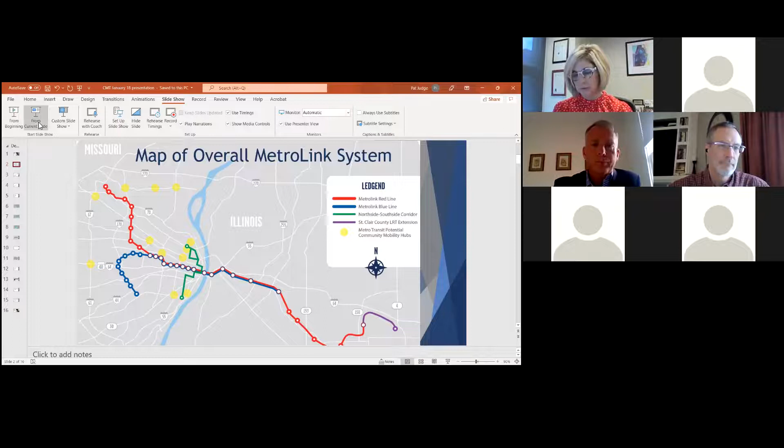So it's important to talk about the stakeholders in this particular project. The project is being funded through a $96 million Rebuild Illinois grant issued by the governor of Illinois, and it's being administered through the Illinois Department of Transportation. Obviously, St. Clair County Transit District is the lead agency on this project, and they've been great to work with so far. The elected officials of St. Clair County are a big part of this project, as well as Mid-America Airport. Of course, the county controls the airport, but Brian Johnson's been great to work with at the airport.

The other stakeholders on this project are Bi-State Development Agency, or Metro, because essentially they will take over this project. We are building this project for them to take over, own, and operate in the future. As Kim mentioned, our company, Gonzalez Companies, provides project management oversight during design, managing the design process.

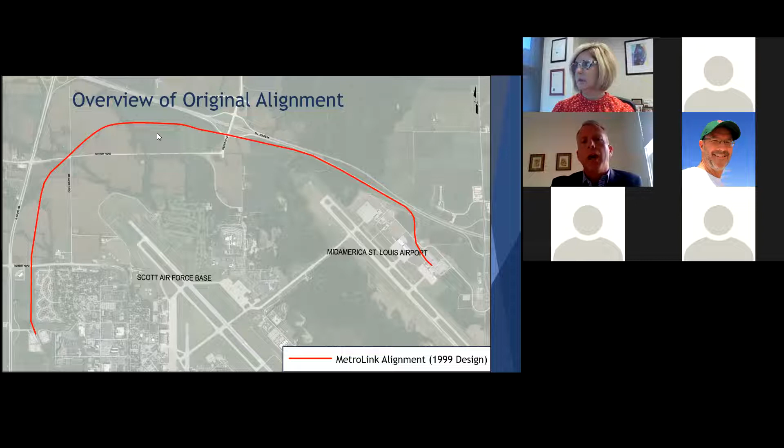First of all, there's been a tremendous amount of development in the area. And when you look at this red line alignment out here, hugging the interstate above Wherry Road, you'll notice it cuts across some prime real estate. So what you'll see on the next slide, and of course we deal with the wetlands which we'll talk about later, is the current alignment, the yellow line on the screen, and we've dropped it down below Wherry Road. The purpose of that is to free up and open up development property above the Metrolink, between the Metrolink and Interstate 64.

So we've been able to drop that alignment down, open up development opportunities for the county. We also eliminated an at-grade crossing, which is a big deal from a safety perspective. Furthermore, on the right-hand side of the screen, you'll see that we have moved the Metrolink passenger station out to the edge of the parking lot. That was at the request of the airport, because essentially by having the Metrolink right up at their front door, it really put some parameters and constraints on the airport in terms of all the development. So there will be a path between the airport front door and the Metrolink platform out there.

As I mentioned, a bike trail, if budget allows, will be included in this project. And that's the blue dashed line along the alignment here.

It's hard to see here, and I'll pop out of the screen, but the access road that I mentioned is a key part of this project. So as it stands today, if you're along Interstate 64 and you want to get to the airport over here, you have to come all the way over to Illinois Route 4, drop down and backtrack. This project will also include a new outer road here, which will essentially connect the Reider Road interchange to the airport.

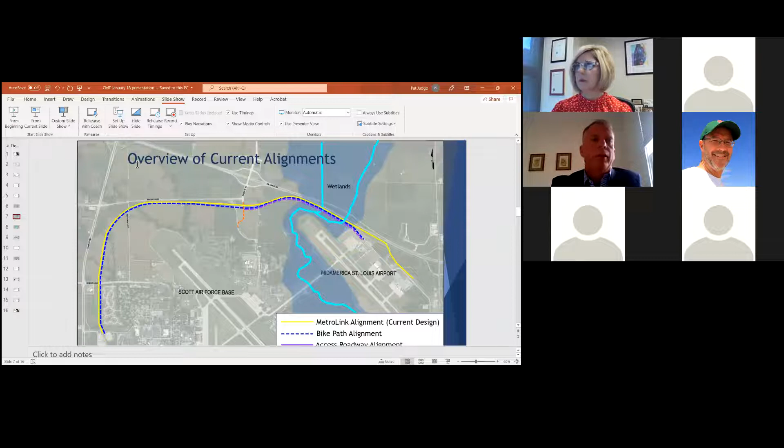So that is a high level alignment of what we're building out here.

Some of the challenges we face, when you look at this on paper, it looks like we're building a train through a farm field. There are a lot of things going on out here. We have runway clear zones to deal with, especially since we moved the alignment and tightened it up away from 64, accident potential zones, and the various local and county roadways out here. We're also dealing with the runway protection zone for Mid-America Airport.

We also have blue line creeks, wetland creeks, or wetland areas that we have to deal with, and endangered species. So we have to be good stewards of the land and make sure we produce this project in a way that we don't harm the various species and habitat out there in the Silver Creek area.

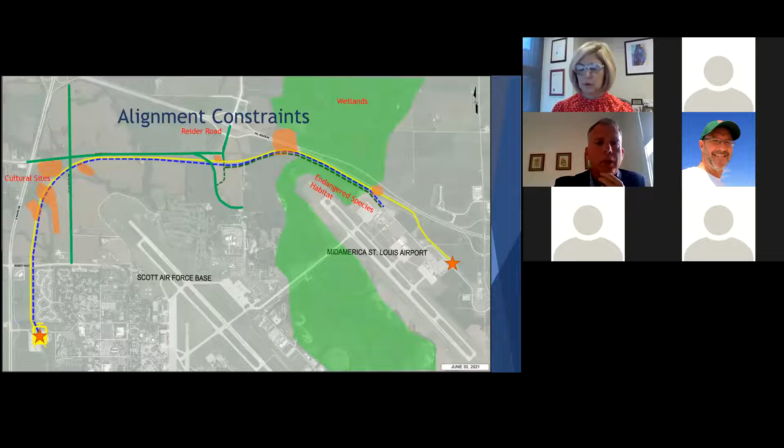Other constraints include cultural sites, Native American sites, that again, we have to be good stewards of the land and make sure we don't do anything there to harm those cultural sites. So again, approximately 5.2 miles is the entire project here.

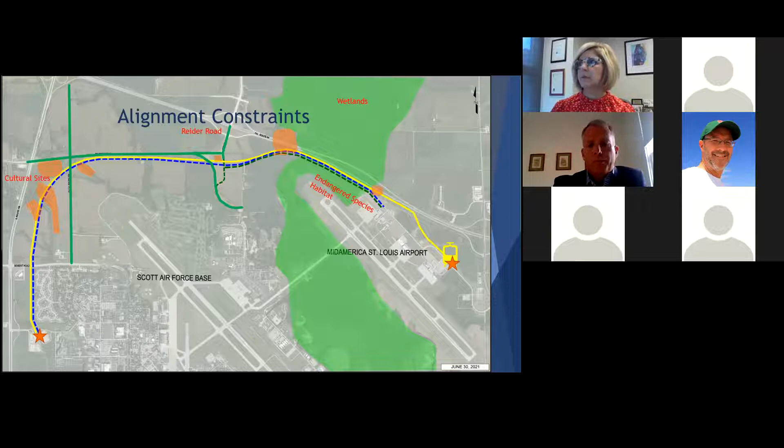Pushing through here, some other challenges we're dealing with: we're working with Ameren. We have a major gas transmission line in the area which just so happens to run right down the middle of our proposed alignment for Metrolink. So that's a big deal. Ameren's been really good to work with so far, in a manner that we can move that gas transmission line out of our way so it doesn't delay our project.

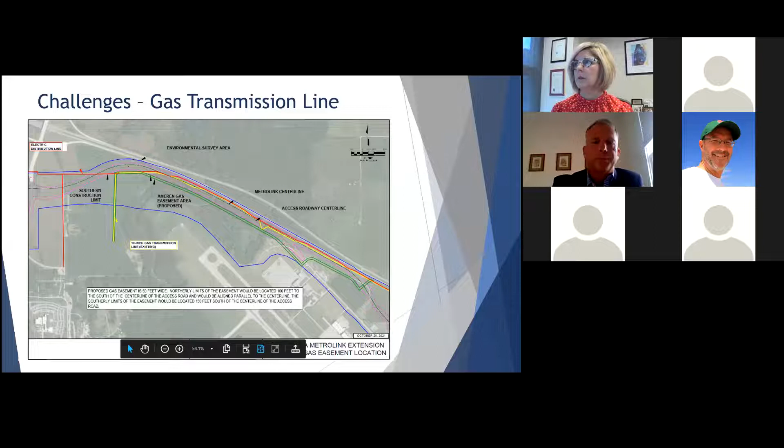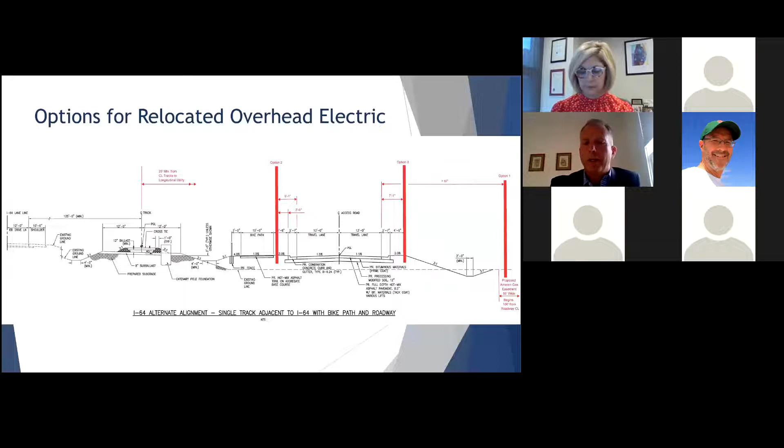Other challenges beyond the ones I've already mentioned, we have a lot of overhead electric lines to deal with out there. This particular slide shows some various options we are considering as it relates to relocating the overhead electric so that we don't have conflicts with our train, but also the new access road we're building.

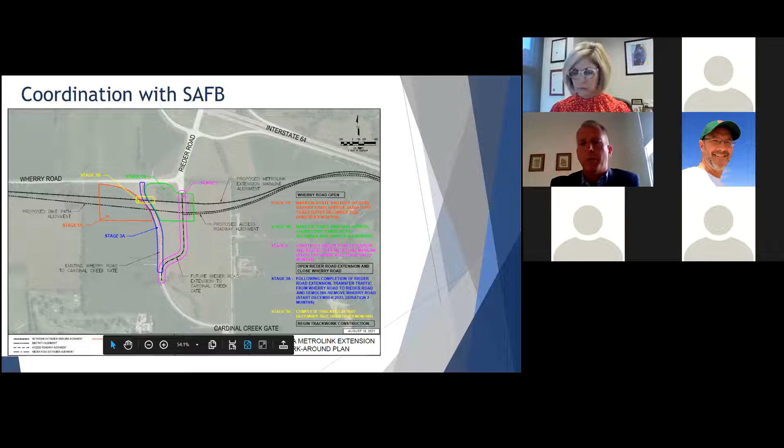Other project challenges, we mentioned Scott Air Force Base previously. This particular slide shows that we have to deal with the Cardinal Creek Gate. Currently Scott Air Force Base opens up the Cardinal Creek Gate in the morning rush hour and the evening rush hour. So in order to not interrupt their services, we have to stage our Metrolink to provide continuous access during those morning and evening rush hours. So that's what this slide represents here.

Project schedule overview: design commenced in October of 2020 and will continue through August of 2022. We're going to start bidding this project out in multiple contracts, beginning in May, and we'll continue to bid various contracts out through February of 2024. Construction, as I mentioned earlier, will break ground this year and run through spring of 2025.

Testing and startup phase, which will be led by Bi-State or Metro. Once we finish construction, they will begin testing the train and running various scenarios to make sure we have a safe operating train. That'll occur in December of '24. Start of revenue service for this extension is spring of 2025.

I mentioned previously that we are separating this overall project into different bid packages. The purpose of that is simple: if we bid this out as one project, we'd have a national construction company come in and take this job. What we really want is to provide economic opportunities for local and regional contractors. So by separating this project into 7 bid packages, we're creating packages that local and regional contractors can bid on as prime contractors.

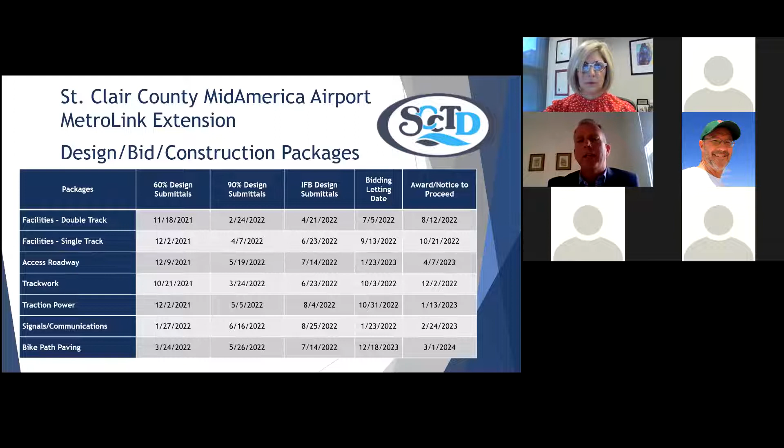And so this is the details of where we're at. We're currently between 60 and 90% on design of the overall project. Current major activities before I wrap up: environmental permitting is a big deal on this project, and that's going well so far, as well as cultural resources and geotechnical borings, getting those in the wetland areas. We anticipate some unsuitable material out there that we'll have to deal with in construction.

We are in the process of purchasing wetland bank credits for this particular project. We're coordinating on a regular basis with the Army Corps of Engineers for permitting, with IDOT District 8 in Collinsville, as well as St. Clair County Highway Department. We have ongoing coordination with Scott Air Force Base, Mid-America Airport, and Ameren, and we're also coordinating regularly with IDOT Transit out of Springfield, which is administering the funding for this particular project.

We are hot and heavy into design submittals and reviews as we speak. So that is the quick 8 or 9 minute overview of the project for everyone. Happy to answer questions later on as they come up.

Thank you, Pat. Exciting to see that potential groundbreaking is set for August of this year.

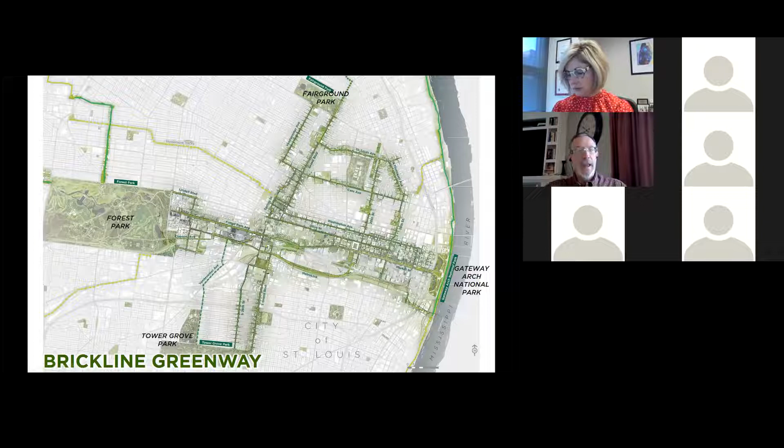It's really a project that has great appeal for lots of different people with lots of different destinations. And the Brickline Greenway is not the only component here. We have partner projects like the 20th Street Cycle Track and the Tower Grove Connector, and other GRG projects: Mississippi Greenway, the Greenway on the Hodiamont Tracks, St. Vincent Greenway, Centennial, and River des Peres.

Again, this is a network of greenways. It's not just a single line on the map. The reach and the potential for serving a great number of people, a huge population, a lot of different neighborhoods, we think is really, really significant.

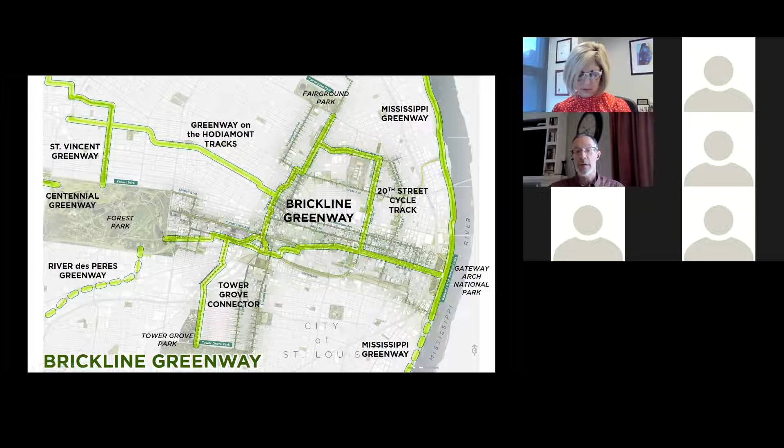And of course, its connection to Metrolink is ultimately a huge game changer. With the original red line and the blue line, every one of the stations shown on this map has at least a quarter mile or a half mile connection to one of the greenways I just mentioned. We think that's such an important aspect to the future success of our project, but also enabling people to access Metrolink in a much more convenient and easy way.

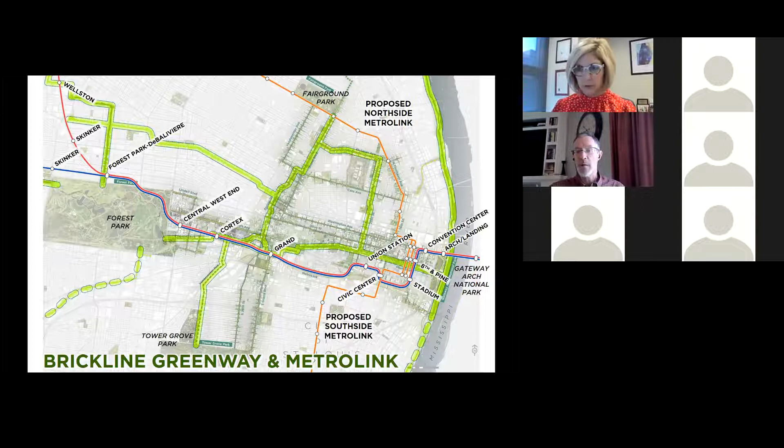We think that the potential for the North Side, South Side Metrolink as well can also have similar impacts. But I want to talk about a few projects that we have underway.

The first one I want to highlight, that Kim knows very, very well—thank you to Metro, Cortex, and other partners—was the development of the Cortex Metrolink station that opened a few years ago. This was funded locally with some local dollars, including some match from GRG, but also a $10 million TIGER grant that we got from the federal government.

All the facilities, including the location for the ticket vending machines, also housing bicycle and scooter parking in a covered area, were all designed collaboratively to make sure that the user experience was just as good for the transit users as the trail users, because we think they're the same people in many locations.

Also picking up on the branding that already occurs within the Cortex community, everything from the benches to the lights, to the branding of the pylon signs.

I mentioned lights—this was a really important part of this project, to make sure the greenway was lit at all hours that we would have users of the transit facility. Typically when you see GRG trails around the region, they're not lit; the trails are typically open during daylight hours. But as we move into more urban situations where people are using the greenways for commuting, we believe strongly they're going to be using it early morning and into the evening, and also at times like when there's Cardinals and Blues games going on.

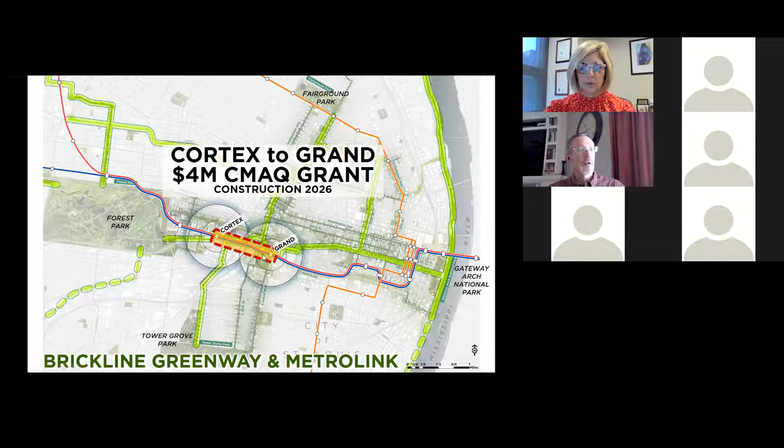So again, this $4 million CMAQ project between Cortex and Grand is going to extend the existing Brickline Greenway that currently exists between Boyle and Sarah. We'll be going three-quarters of a mile to the Grand Station along the light rail tracks. So we got some nice imagery.

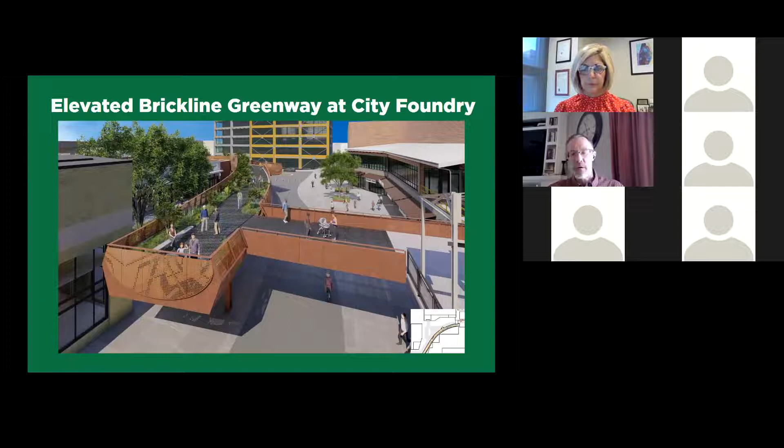But there are some elements that are very important to make transit-oriented and trail-oriented development successful. The first one is you need the infrastructure. Transit and trail - we have to have a way of moving people around. So that's the first component that is pretty obvious, but it's very necessary.

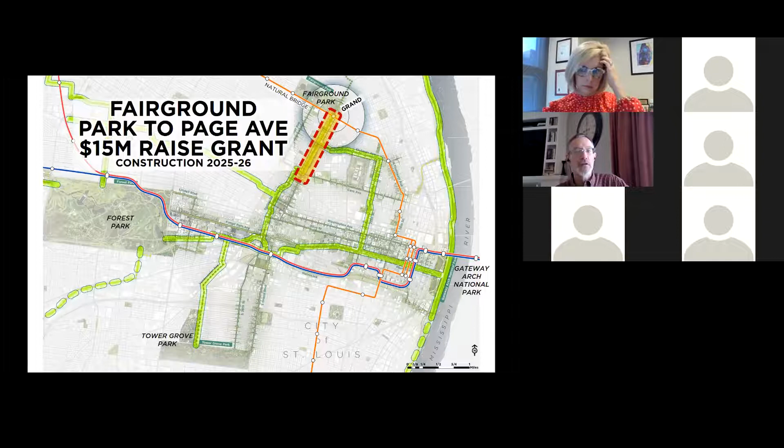And so finally, I want to end on another project award that we just received. We received a RAISE grant for $15 million for the northern section of Brickline Greenway along Grand Avenue, from Fairground Park south to Page. I'm not going to talk about the design for this. We're still just getting started, but if and when the North Side Metrolink comes in here, we hope this project can have that trail and transit-oriented development opportunity to reinvest in some of these North Side neighborhoods the same way we're doing in Cortex. So with that, I'll stop sharing and turn it back over to Kim.

Thank you, Mark. I think the presentation is super exciting to see movement on the trails and greenways to transit and that connection. I love some of Mark's comments about partnerships and collaboration and the networks we're creating, and I think that's really important as we move forward. And you ended on a perfect note, the North Side.

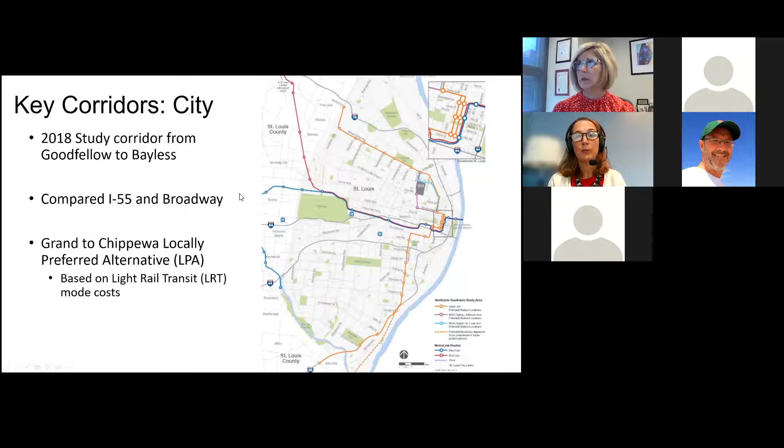If we go to the next slide, really we feel there is tremendous opportunity to think about what it looks like downtown. There's been so much change, so much opportunity and development in downtown, even since 2018, that we're really looking at what the possibilities are here. I should caveat that we are looking at both light rail and bus rapid transit for both the city and the county, so it's not just light rail. Really thinking about what these opportunities are, how we can be a catalyst for connectivity and mobility into downtown, to help revitalize and support all of the development and money that has been invested in the city.

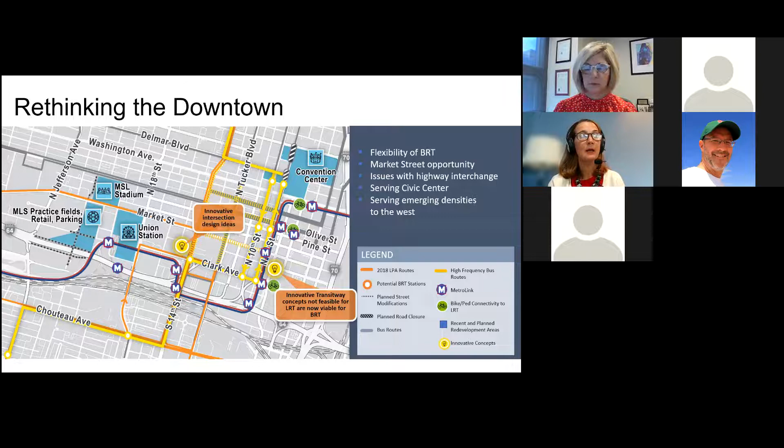If we go to the next slide, this talks about what we're looking at for the county. And again, we're still in negotiations on exactly what the county is looking for. Really it's looking at both the connection for North County into the city and out of the city, and taking advantage of the opportunity for development that is in North County. Same thing for South County — we've just seen tremendous opportunity for development there. So we're working and looking at both light rail and bus rapid transit.

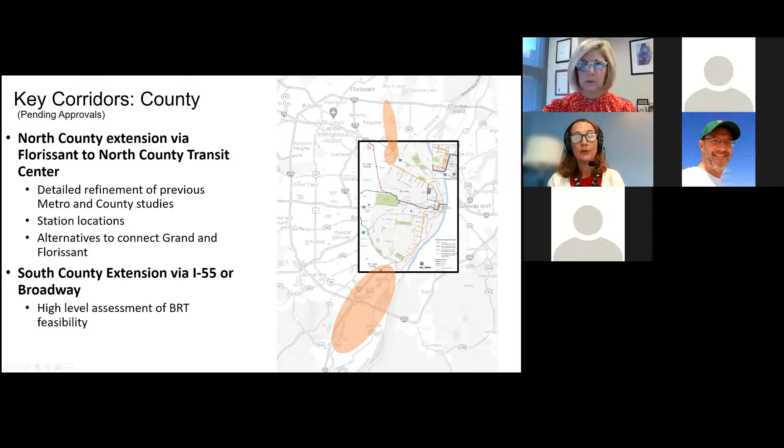So how are we going to approach this? If we go to the next slide — how are we going to approach this? We've got to take a look at what was done in 2018.

Obviously, our demographics have changed. COVID has impacted ridership and how people are thinking about utilizing transit. We've had different sales tax projections, and technology, and our ability for utilizing light rail or bus rapid transit has changed significantly. And then, of course, the county's participation, which is phenomenal that we've been able to bring the region together, and bi-state is critical here too in helping with the leadership. So we'll do a comparison of what the investments and benefits are of either bus rapid transit, light rail, or a combination, the ridership projections, so we can align the region to be best suited for potential federal funding.

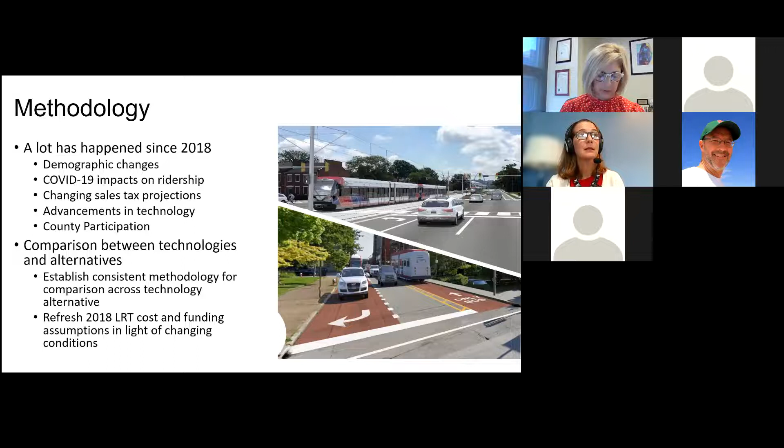So why are we doing this? Why is the timeline so critical? Well, there's the IIJA, the federal funding, the potential for funding that is available now and in the future. We've got to advance the study and understand what is the best benefit and opportunity for federal funding within the region so we can be a successful candidate.